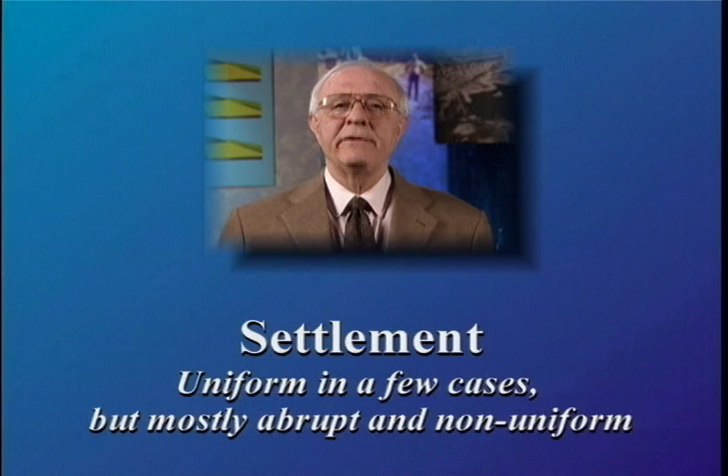In many instances, liquefaction is manifested by the formation of sand boils and mud spouts at the ground surface, as shown in this photograph, taken during an earthquake in northern Japan in 1978. The consequences of liquefaction have been settlement—uniform in a few cases but mostly abrupt and non-uniform—lateral spread, meaning limited lateral movement, for example at the Upper San Fernando Dam, and lateral flow, meaning extensive lateral movement, for example at the Lower San Fernando Dam.

It may be useful to briefly review this phenomenon at this time. When a saturated sand is subjected to ground vibrations, it tends to compact and decrease in volume. If drainage is unable to occur, the tendency to decrease in volume results in an increase in pore water pressure. Thus, the basic cause of liquefaction in saturated cohesionless soils during earthquakes is the buildup of excess pore water pressure due to the application of cyclic shear stresses induced by the ground motions.

As a consequence, the structure of the cohesionless soil tends to become more compact, with a resulting transfer of stress to the pore water and a reduction in the stress on the soil grains. The soil grain structure must rebound to the extent required to keep the volume constant, as illustrated in this figure.

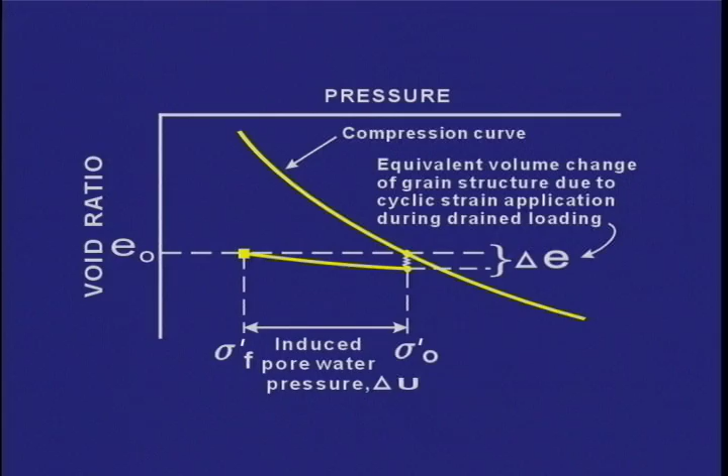As the pore water pressure approaches a value equal to the initial effective confining pressure, the sand begins to undergo deformations. If the sand is loose, the pore pressure will increase suddenly to a value equal to the initial effective confining pressure, and the sand will rapidly begin to undergo large deformations, with shear strains that may exceed 20%. If the sand can undergo virtually unlimited deformations without mobilizing significant resistance to deformation, the sand can be said to have liquefied.

If, on the other hand, the sand is dense, it may develop a residual pore water pressure on completion of a full stress cycle. This pore water pressure would be equal to the initial effective confining pressure. But when the cyclic stress is reapplied on the next stress cycle, or if the sand is subjected to monotonic loading, the soil will tend to dilate, the pore pressure will drop if the sand is undrained, and the soil will ultimately develop enough resistance to withstand the applied stress.

However, the sand will have to undergo some degree of deformation to develop resistance, and as the cyclic loading continues, the amount of deformation required to produce a stable condition may increase.

Liquefaction of sand in this way may develop in any zone of a deposit where the necessary combination of in situ conditions and vibratory deformations may occur. Such a zone may be at the surface or at some depth below the ground surface, depending only on the state of the sand and the induced motions.

Liquefaction of the upper layers of a deposit may also occur not as a direct result of the ground motions to which they are subjected, but because of the development of liquefaction in the underlying zone of the deposit. Once liquefaction develops at some depth in a mass of sand, the excess hydrostatic pressures in the liquefied zone will dissipate by flow of water in an upward direction. If the hydraulic gradient becomes sufficiently large, the upward flow of water will induce a quick or liquefied condition in the surface layers of the deposit.

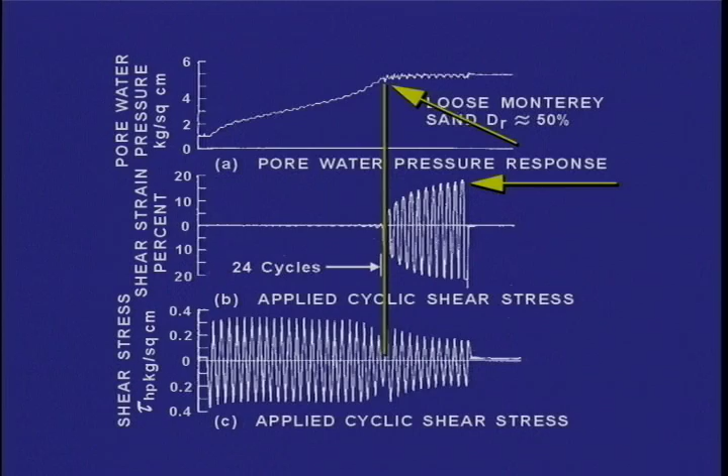When the pore pressure becomes equal to the initial confining pressure, the induced strain in the sample increases very rapidly. For this test, reaching a condition of 100% pore pressure ratio coincides with the onset of inducing very large strains in the sample. This behavior is typical of a sample of loose sands.

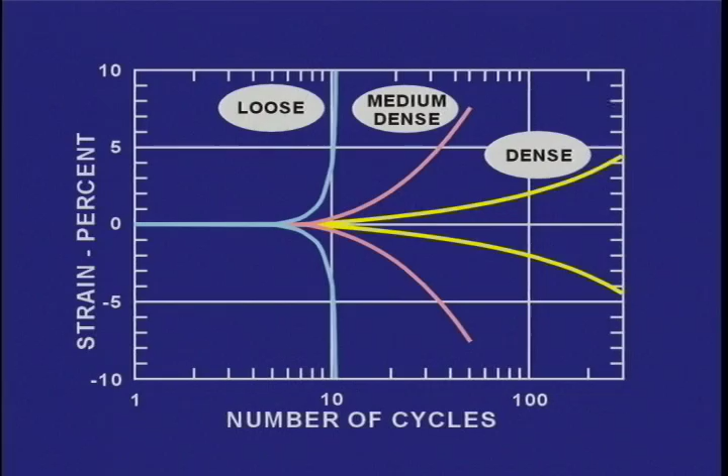Medium dense and dense samples of sand behave significantly differently as shown in this figure. A dense sand can continue to sustain an applied load although a 100% pore pressure ratio had been reached. This ratio typically is reached at about 2 to 3% strain for many cohesionless soils. Reaching 100% pore pressure ratio has been defined as a condition of initial liquefaction.

Tests completed in the past some 35 years indicate that the tendency for a sand to liquefy is affected by: 1. Density, relative density or relative compaction. 2. Effective confining pressure. 3. Level of shaking, applied shear stress, often expressed in terms of the ratio of the cyclic shear stress divided by the initial effective normal stress on the plane of failure.

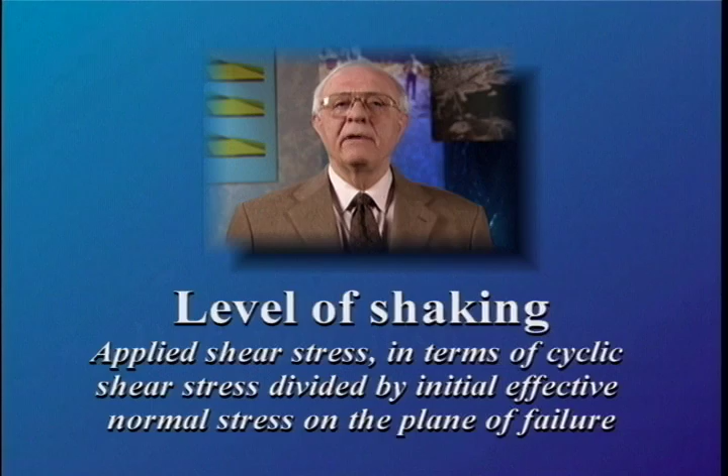4. Duration of shaking, or number of cycles. 5. Soil type and soil structure, or fabric. 6. Stress conditions before onset of shaking. 7. Other factors such as seismic history, geologic history, which may reflect aging, cementation, and other factors.

Field performance data for cases of liquefaction or no liquefaction at sites in Japan, California, and other parts of the world have also been used to establish a relationship between the cyclic stress ratio required to cause liquefaction and some index property that reflects the various parameters we just discussed.

Initially, relative density was used as the index, but was quickly abandoned because it was insufficient to reflect many of the key parameters, such as fabric and aging. SPT blow count and CPT tip resistance can reflect most of the important factors that affect susceptibility to liquefaction.

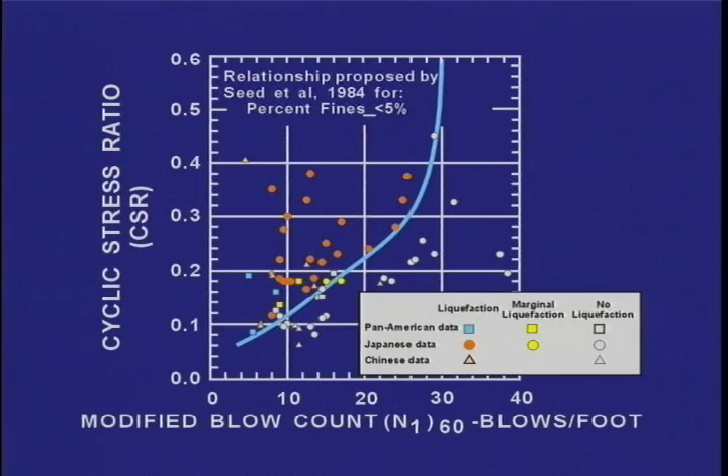This figure summarizes the field cases of liquefaction and no liquefaction for essentially clean sands, that is, fines content less than 5%, in terms of the cyclic stress ratio, CSR, versus modified SPT blow count, N160.

Similar field cases for silty sands with various fines content are also available and were used to develop the relationships shown in this figure. The lower curve in this figure shows the relationship developed for relating the cyclic stress ratio to the corrected SPT blow count, N160, for essentially clean sands. The middle curve is for fines content of 15%, and the upper curve is for cohesionless soils with fines content greater than or equal to 35%.

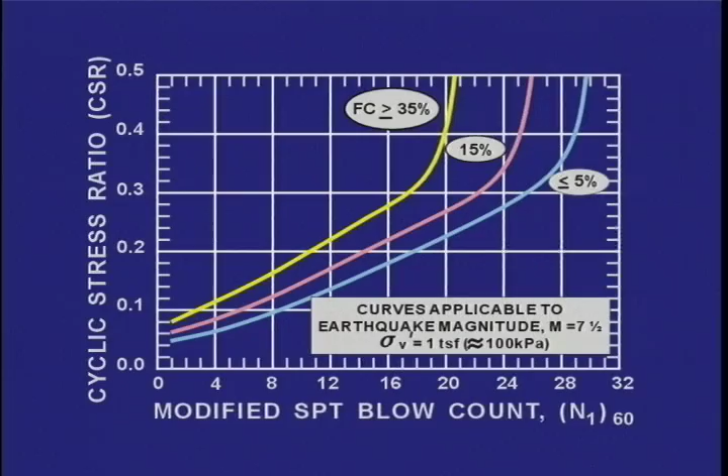Similar curves relating cyclic stress ratio to CPT tip resistance and curves relating cyclic stress ratio to shear wave velocity have also been developed and can be used in many cases.

It has always been my belief that if the cyclic resistance of a soil is to be based on such curves, the use of the SPT-based curves is probably sufficient by itself because the sample is usually obtained when the SPT blow count is collected, and the soil type can then be ascertained and the fines content can be measured if needed.

Such information is not explicitly available for CPT or shear wave velocity measurements. Therefore, I believe it is crucial to augment a CPT-based or a shear wave velocity-based evaluation by sampling.

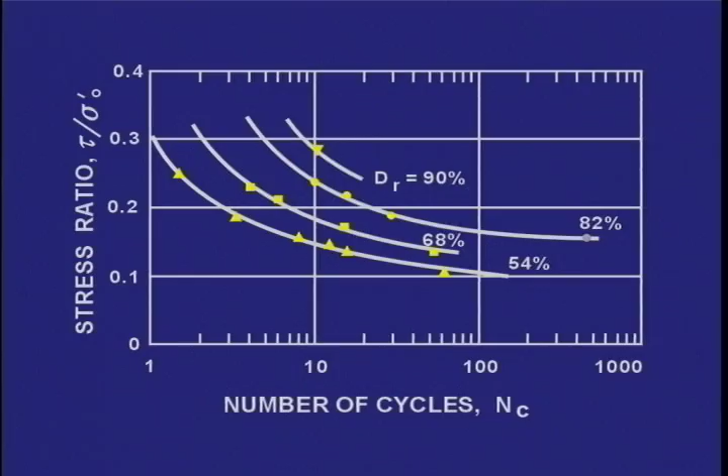When using laboratory test data such as those shown in this figure, it is necessary to select a number of cycles for evaluating the cyclic resistance to liquefaction. The number of cycles has been related to earthquake magnitude as follows.

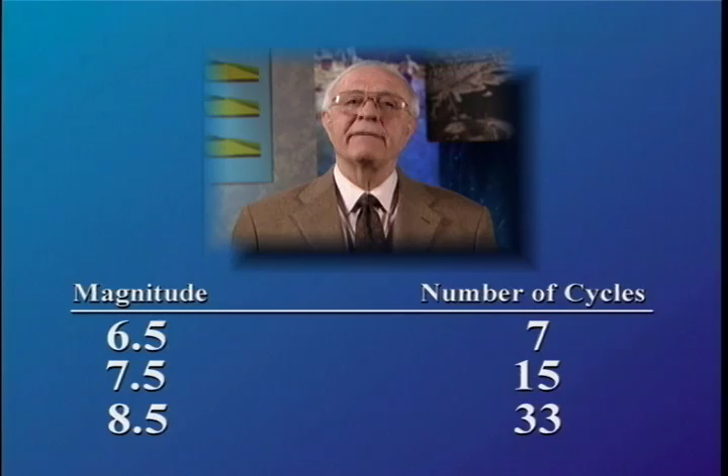Magnitude 6.5, number of cycles equals 7. Magnitude 7.5, number of cycles equals 15. Magnitude 8.5, number of cycles equals 33.

To obtain the cyclic stress ratio for a confining pressure other than 1 ton per square foot, the cyclic stress ratio is multiplied by a factor, K sigma, which depends on the value of the effective confining pressure, as shown in this figure. The symbols in the figure represent the results from a number of cyclic tests. The curves represent values recommended in various studies or projects.

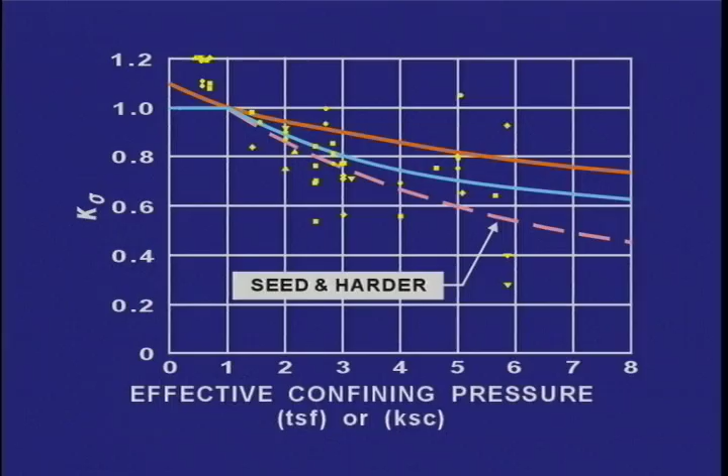The most recent work on this subject, however, suggests that the variation of K sigma with the effective confining pressure also depends on the relative density of the soil, with the effect being least for looser soils. This subject is still under evaluation, and I suggest that the latest work be consulted prior to selecting a K sigma relationship for use in a specific application.

The initial static shear stress on the potential failure plane also influences the resistance to liquefaction. The ratio of this static shear stress divided by initial effective vertical stress on the plane of failure is defined as alpha, as shown in the figure.

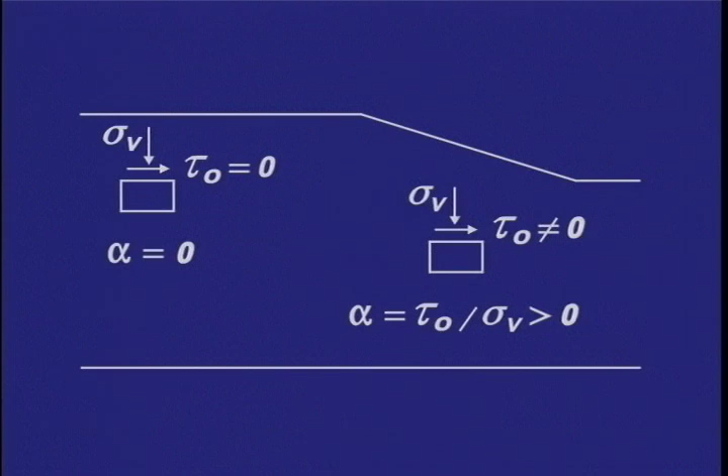Adjustments for the effects of the initial shear stress on the potential failure plane, that is, alpha not equal to 0, are accommodated by multiplying the cyclic stress ratio for alpha equal to 0 by a factor, K alpha, which appears to depend on alpha as well as the denseness of the soil as shown in this figure.

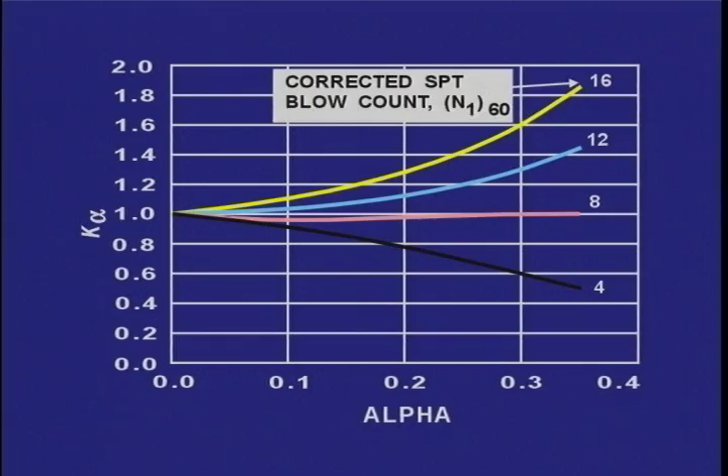It should be noted that the relationships shown in this figure are for an effective confining pressure less than 300 kPa. The values for K alpha shown in this figure will be different for other values of confining pressure. For confining pressure greater than 300 kPa, the curves in the figure would have to be rotated clockwise, that is, giving a lower value of K alpha.

The variation of K alpha with N160 or some other measure of denseness and with confining pressure is also another subject that is being evaluated further. Again, it is recommended that the latest work be consulted prior to selecting a K alpha relationship for use in a specific application.

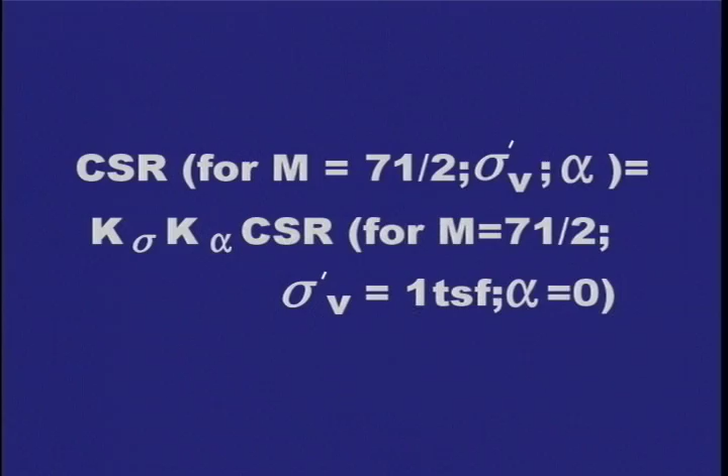Hence, the cyclic stress ratio for a part of the dam or its foundation at a given effective vertical stress and an alpha, and with a corrected SPT blow count N160, is given by this equation. This value of the cyclic stress ratio will then be multiplied by the effective vertical stress to obtain the cyclic resistance at that location, if the duration of shaking were to be representative of a magnitude 7.5 earthquake.

Usually this value of cyclic resistance is to be compared to the stresses induced by the earthquake at that location of the dam or its foundation. The values of stresses induced by the earthquake in the dam or its foundation are usually obtained from a dynamic analysis, which will be discussed later.

In some applications, it may be appropriate to utilize the Seed-Idriss simplified procedure to obtain a first-order approximation of the value of the induced stress at a specific depth. Caution should be exercised when using the latter procedure because it is quite possible to overestimate the inertial force acting at that depth, since the simplified procedure was derived for a level ground.

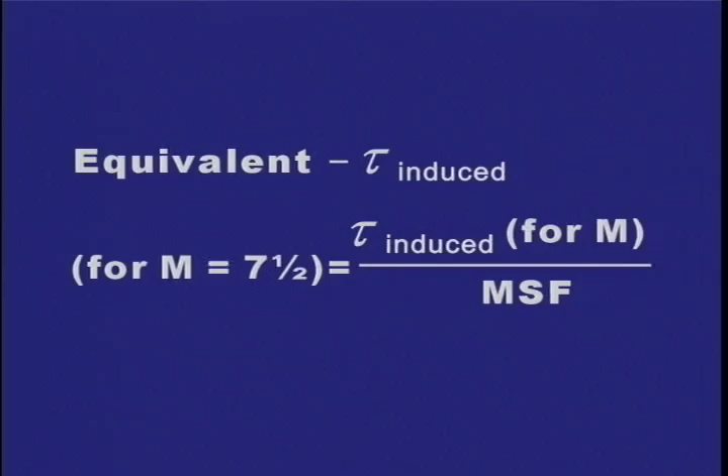If the size of the earthquake being considered is not 7.5, then I prefer to divide the induced stress by the corresponding magnitude scaling factor. This will lead to a value of induced stress equivalent to that induced by an earthquake whose magnitude is 7.5. Thus, the equivalent induced stress is given by this equation.

This equivalent induced stress can then be compared to the cyclic resistance obtained for magnitude 7.5 to assess the potential for liquefaction at that location within the dam or its foundation.

The ratio of the available cyclic resistance divided by the induced stress is typically defined as a factor of safety against liquefaction. When this factor of safety is equal to or less than 1, liquefaction is considered to be triggered within that part of the dam or its foundation.

The actual performance of the dam and its foundation, however, is dependent on the location and extent of the zone where liquefaction is triggered and on the strength of the soil that liquefied. The shear resistance of the liquefied soils has been estimated based on back analysis of available case histories.

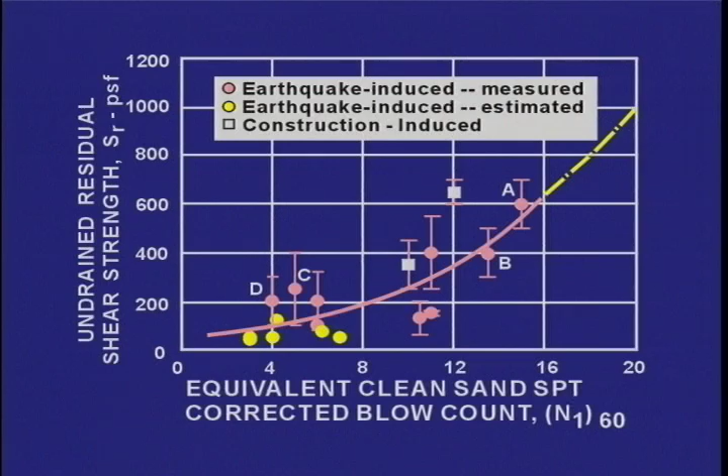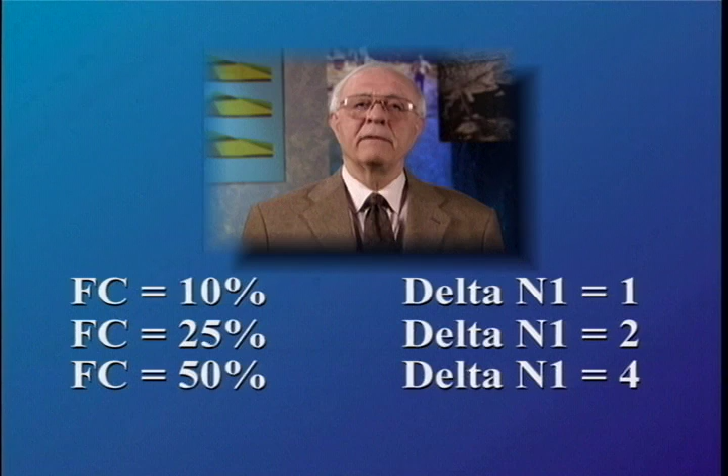The equivalent clean sand N160 is obtained from the measured N160 by adding a delta N1 that depends on the fines content of the soils as follows: for a fines content equal to 10%, delta N1 equals 1; for a fines content equal to 25%, delta N1 equals 2; for a fines content equal to 50%, delta N1 equals 4; and for a fines content equal to 75%, delta N1 equals 5. These values of delta N1 were initially proposed by the late Professor H.

Bolton Seed proposed basing the residual soil strength on evaluation of actual slides. A limit to the residual strength should always be the drained strength of the soil.

For cohesionless soils having fines content greater than or equal to 25%, it is useful to replot the data without including delta N1 and using the resultant relationship for applications involving cohesionless soils with such high fines content. The use of steady state strength has also been proposed to estimate the residual strength of a liquefied soil.

The measurements would be made on very high quality, relatively undisturbed samples of the soils under consideration. The presence of less permeable soil layers overlying the liquefied soils that could impede drainage and result in void ratio redistribution cannot properly be accounted for in a typical steady state test.

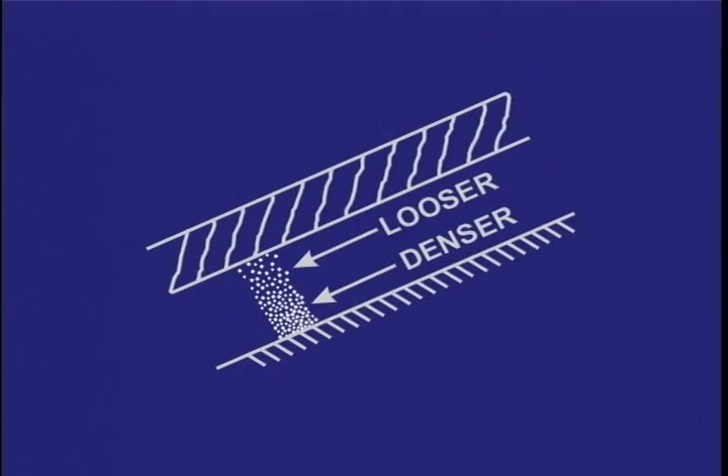This possibility is illustrated in the figure and shows how, due to shaking, the upper portion of the sand layer would tend to become looser while the bottom portion would tend to become denser. The steady state strength of the upper portion is significantly lower than that for a soil having the initial void ratio of the entire cohesionless soil layer.

Accordingly, at this time, it is preferable to use the residual strength based on case histories rather than relying on laboratory test data. This figure illustrates the behavior of a cohesionless soil depending on its denseness.

The bottom curve in this figure is for a specimen of loose sand, which is contractive, and hence it would tend to stabilize at a residual strength far lower than its peak strength. The top curve is for a specimen of very dense sand, which is dilative, and its shear strength would tend to increase as it is sheared further.

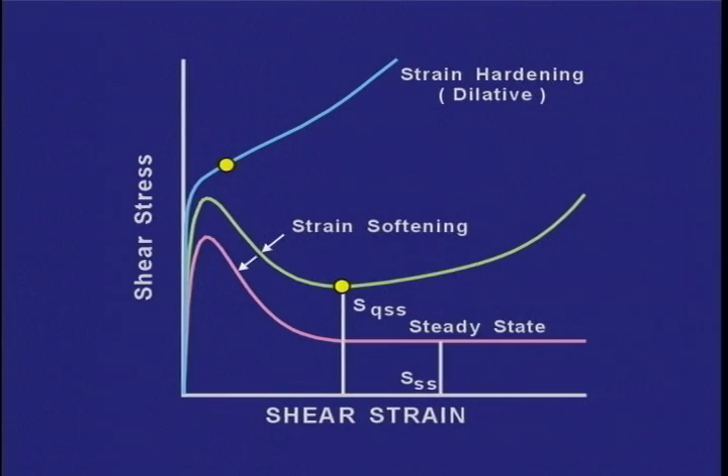The middle curve is for a specimen of sand of intermediate denseness, which could initially reduce in strength to a quasi-steady state, beyond which the soil will dilate, thus increasing its shear strength as shown in the figure.

Therefore, when using residual strength in calculating post-earthquake performance, it is necessary to keep in mind that relatively loose sand must experience large strains to achieve its residual strength. Hence, it is more important to estimate deformation following the occurrence of an earthquake than to just calculate the factor of safety against sliding based on limit equilibrium.

This aspect will be discussed later when we turn our attention to analysis and evaluation procedures. The above discussion pertains to cohesionless soils. Occasionally, we are concerned also with the behavior of cohesive soils. Most cohesive soils do not suffer appreciable reduction in strength due to cyclic loading.

Typically, a reduction in strength of the order of 10 to 20% may be reasonable to assume, depending on the intensity of shaking. We must keep in mind, however, that some cohesive soils with very high water content have exhibited significant loss of strength due to shaking.

These soils are usually evaluated using the so-called Chinese criteria. In most cases, however, results of cyclic tests on properly prepared samples of such soils may prove to be more appropriate to use than applying the Chinese criteria.

The Chinese criteria are most useful for screening purposes, and I strongly suggest that the criteria be applied with a great deal of caution. Since the Chinese criteria utilize water content, liquid limit, and clay fraction, some uncertainty should be applied to each of these parameters when applying these criteria.

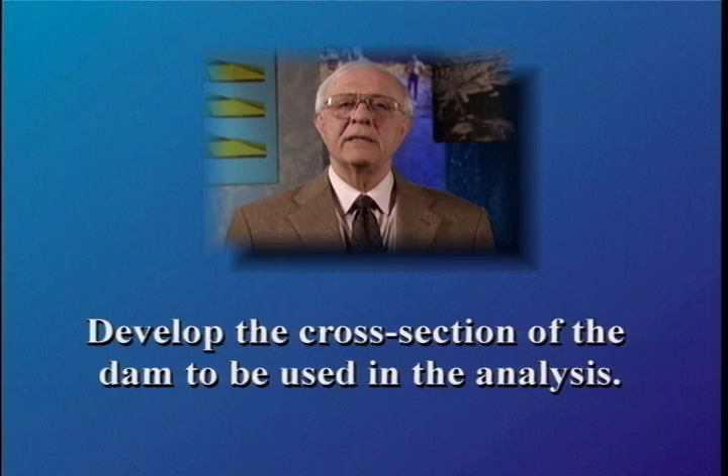The steps involved in this analysis procedure are the following. One, develop the cross-section of the dam to be used in the analysis. Two, select an accelerogram for use as input at the base of the dam foundation system. This selection is to be completed in cooperation with geologists and seismologists. Three, determine as accurately as possible the stresses existing in the embankment before the earthquake.

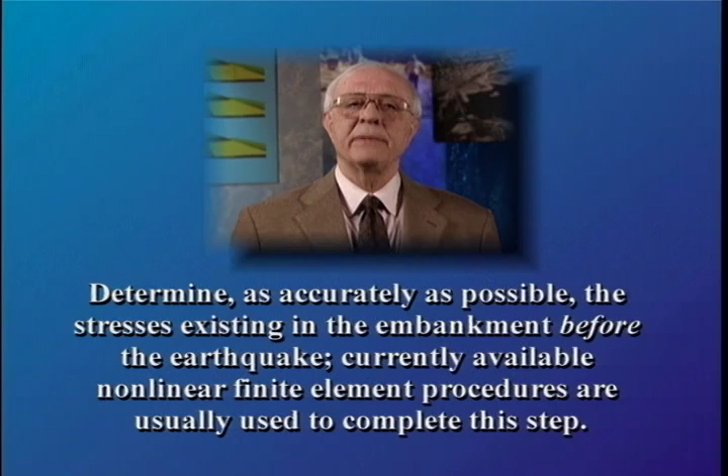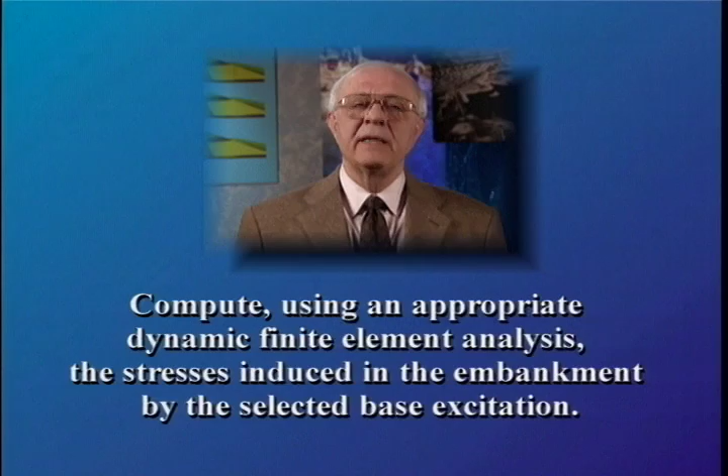Currently available nonlinear finite element procedures are usually used to complete this step. Four, determine the strain-compatible dynamic properties of the soils comprising the dam. Five, compute, using an appropriate dynamic finite element analysis, the stresses induced in the embankment by the selected base excitation. Six, ascertain the cyclic resistance of the soils comprising the embankment. This may be done by testing appropriate samples of the soils or by relying on correlations with in situ properties such as SPT or CPT.

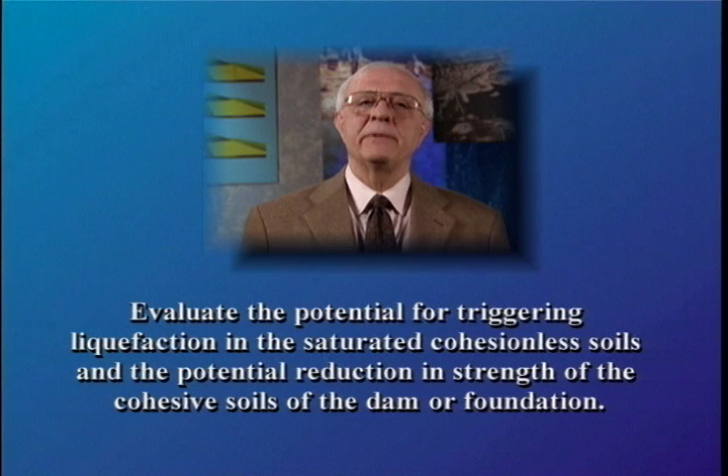Seven, evaluate the potential for triggering liquefaction in the saturated cohesionless soils and the potential reduction in strength of the cohesive soils of the dam or foundation. Eight, check the stability of the cross-section after the shaking has stopped, incorporating the results of step seven.

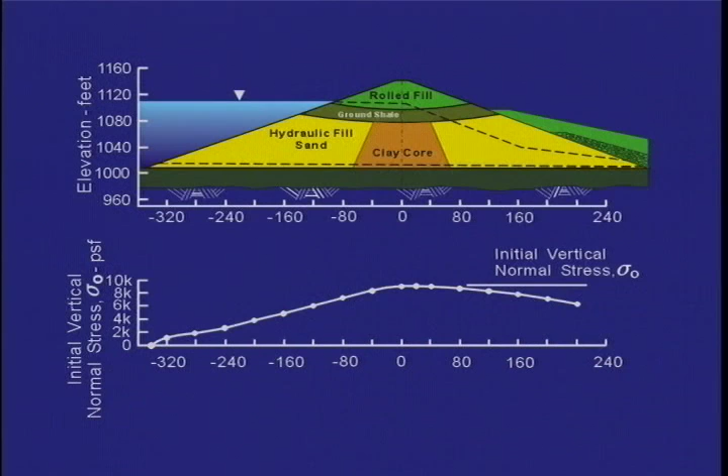The application of the Seed-Lee-Idriss analysis procedure is illustrated in the next few figures, as it was applied to the lower San Fernando Dam, which suffered a massive upstream slide as a result of the shaking it received during the 1971 San Fernando earthquake. The upper part of the first figure shows the maximum cross-section of the dam and its foundation. The lower part of the figure shows the calculated initial, that is prior to the earthquake, vertical normal stresses, sigma o, along the horizontal profile depicted in the upper part of the figure.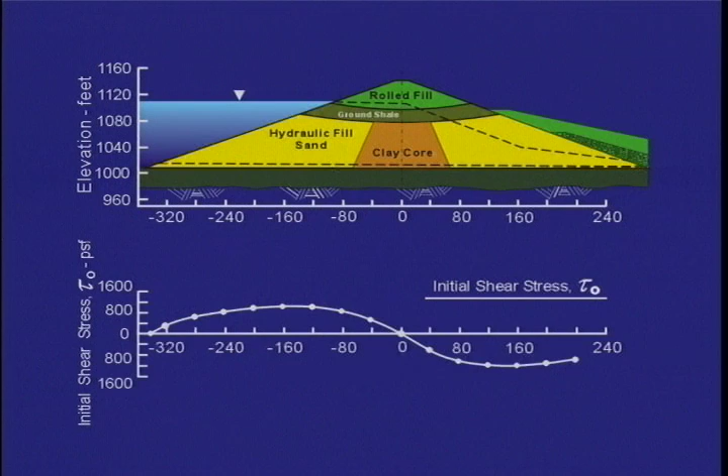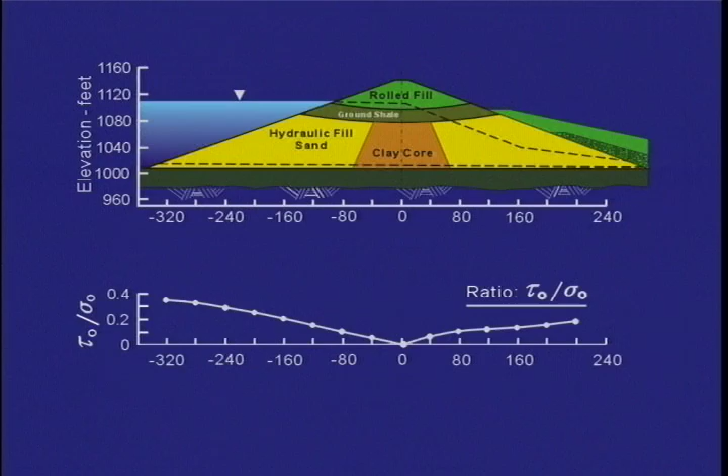The next figure shows the calculated initial shear stresses, tau, along the same profile. The ratio of tau over sigma v prime, that is alpha, is depicted in the lower part of this figure. The static stresses shown in these figures were calculated using a nonlinear finite element program developed by Professor Duncan and his colleagues. The accelerogram used as input to the base of the dam foundation is shown in this figure.

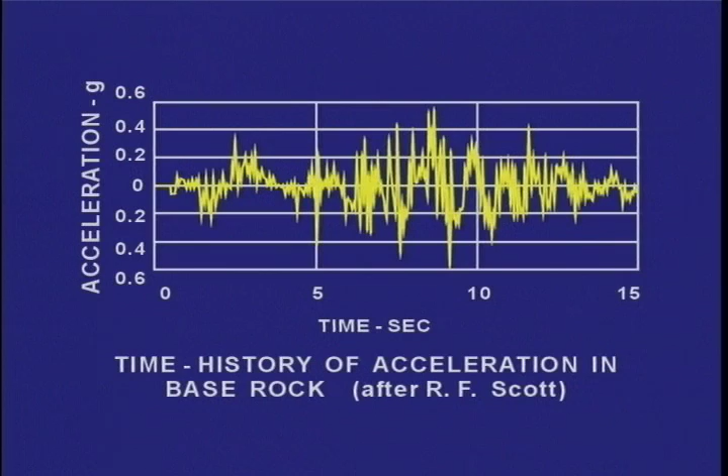This accelerogram was constructed by Professor R.F. Scott using the seismoscope record obtained at the abutment of the dam. The program Quad4 was used to calculate the shear stresses induced by the shaking.

The equivalent uniform shear stresses induced along the same horizontal profiles shown previously, after the first 10.5 seconds of shaking, are presented in the lower part of this figure. The number of equivalent uniform cycles estimated for this duration, using 65% of the maximum induced shear stress, is 2 cycles. Also shown in the lower part of the figure are the values of the cyclic stress required to cause liquefaction in 2 cycles. The latter values had been determined from the results of cyclic triaxial tests conducted on samples of the shell material.

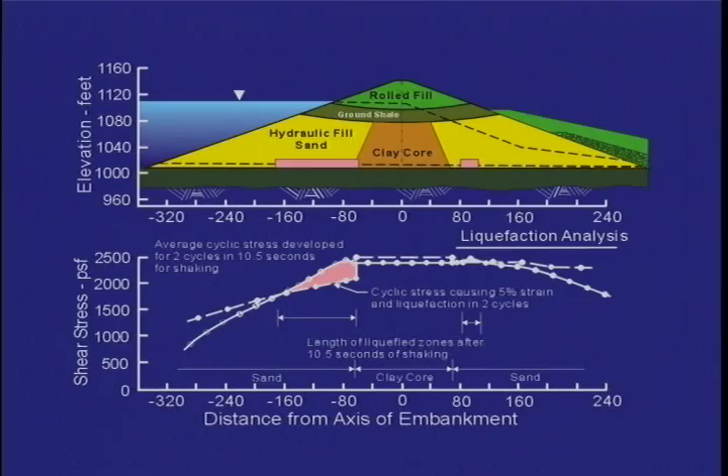The portions along the horizontal profile where the induced stresses exceed the stresses required to cause liquefaction are identified as having liquefied, and are depicted in red in the upper part of the figure. Similar evaluations were made along additional horizontal profiles within this section of the dam to identify the portion of the shells that would liquefy during this earthquake. These are shown in red in this figure.

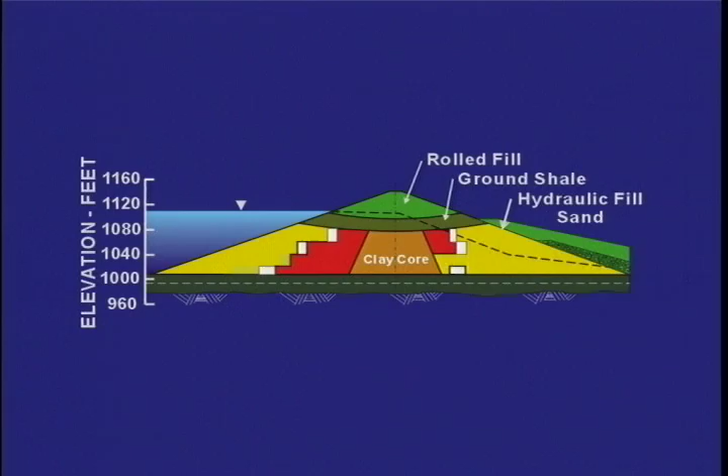As the shaking continues, the extent of liquefaction increases within the shell, as shown in this figure. The full extent of liquefaction within the shells is depicted for the entire duration of shaking. The results of the dynamic analyses, coupled with laboratory cyclic test results, provided the means to estimate the extent of liquefaction in the shells of the Lower San Fernando Dam.

The shear strength within the liquefied portion is reduced, and the possibility of a slide is checked by conducting a limit equilibrium static slope stability analysis, as shown in this figure. This analysis indicates that the slope is, at best, on the verge of slipping.

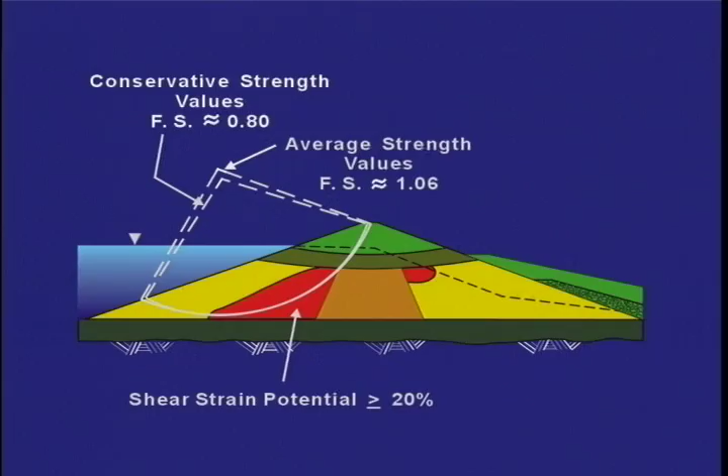More recent work on the post-earthquake stability of this cross-section provided an estimate of the residual strength of the liquefied soils within the upstream shell of this dam. As I noted earlier, equivalent linear procedures are adequate for calculating shear stresses induced by earthquake ground motions.

The equivalent linear procedure is useful in assessing the extent of concern with an existing embankment dam. If results indicate that no significant portions of the dam are likely to have significant reduction in strength due to shaking, then the dam will most likely perform quite well during future earthquakes.

If, on the other hand, this type of analysis indicates that large portions of the dam can have major reduction in strength due to liquefaction being triggered, then further evaluations are needed to judge how poorly the dam would perform if no remediations are implemented.

Limit equilibrium slope stability analyses would be useful to conduct in the following sequence. Step 1: Assign the appropriate residual strength to the soils in the liquefied zones. If the calculated factor of safety is less than or slightly above unity, then this dam is likely to have a flow slide and remediation is necessary. If, on the other hand, the factor of safety is well above unity, conduct the analysis suggested in Step 2.

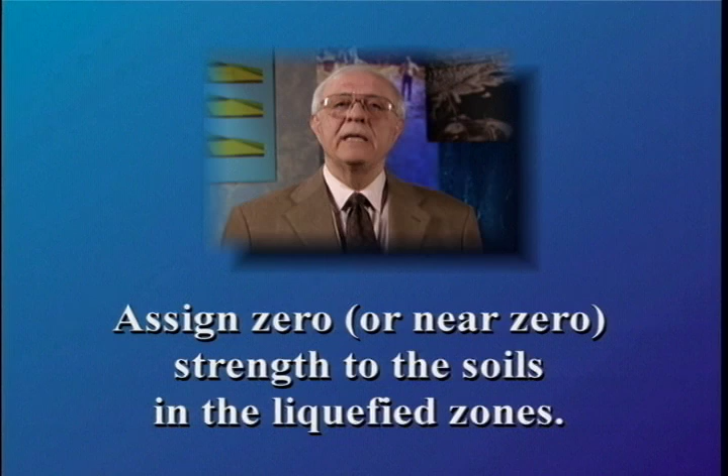Step 2: Assign zero or near-zero strength to the soils in the liquefied zones. If the calculated factor of safety is still well above unity, then the dam is likely to experience only minor movements and no extensive remediation is needed. If, on the other hand, the calculated factor of safety is now less than or slightly above unity, then this dam is likely to have major movement and remediation may be necessary.

To judge the need and extent of remediation, deformation analyses are required. To evaluate deformations of a dam, it is necessary to utilize a fully nonlinear procedure to estimate movements or deformations. In many cases, it is sufficient to compute these deformations for the post-earthquake conditions. Static nonlinear analyses can be used for this purpose.

This would be the case if the duration of shaking is relatively short, so that liquefaction is most likely to occur near the end of shaking. In some instances, it is necessary to estimate the deformed shape of the embankment during shaking and after shaking stops. Dynamic nonlinear analyses are needed for such calculations.

These analyses are usually needed when the duration of shaking is relatively long and liquefaction is likely to occur well before shaking stops. At this time, there are several procedures that have been used for calculating the deformed shape of an earth dam due to an earthquake.

When using nonlinear procedures, it is important that appropriate calibration of the procedure and the associated computer program have been done and verified. The end of this video includes references to nonlinear procedures that have been used most widely in the past few years. To examine the usefulness of using nonlinear procedures, I will summarize two cases.

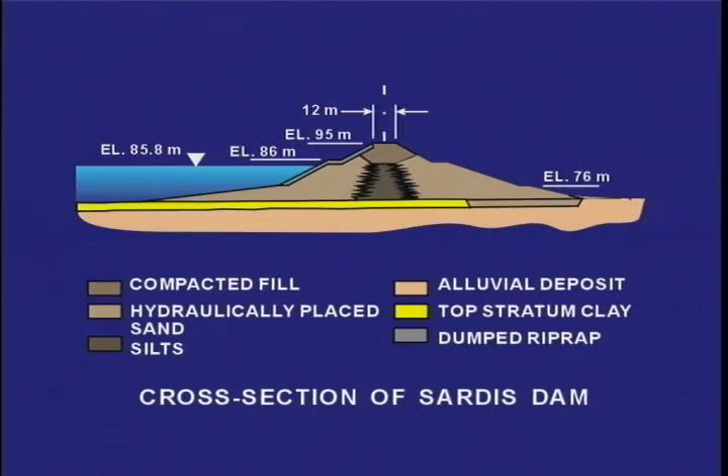The upper part of the foundation consists of what is known as the top stratum clay, which is underlain by a relatively competent alluvial deposit consisting of sands, underlain by tertiary silts and clays. Sardis Dam is a U.S. Army Corps of Engineers dam.

It was evaluated by the Vicksburg District for a magnitude 8 earthquake occurring in the New Madrid seismic zone, resulting in a peak acceleration of 0.2 G in the free field of the dam site. The Corps of Engineers was assisted in this evaluation by Woodward Clyde Consultants, the Waterways Experiment Station, Professor James K. Mitchell, and Professor Liam Finn.

An equivalent linear analysis indicated that liquefaction is likely to occur in the hydraulically placed silt core and in the lower portions of the hydraulically placed upstream shell.

The upper part of the top stratum clay was judged to have the potential to suffer major loss of strength and was assigned a residual strength corresponding to an effective angle of friction of about 4.5 degrees. The post-earthquake factor of safety of the weakened cross-section was well below 1, indicating that the dam is likely to deform significantly due to the earthquake ground motions under consideration.

which could impair the stability of the dam. Accordingly, the Corps of Engineers decided to remediate the dam. After evaluating many of the potential remediation options, concrete piles were selected to be driven through the lower part of the upstream shell and well below the top stratum clay, as shown in the figure, thus providing the additional resistance to constrain movement of the upstream shell.

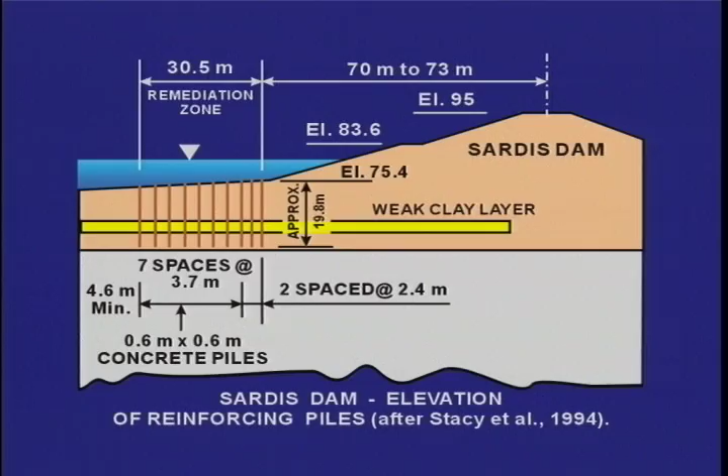The layout of the piles is shown in this figure. The dam is approximately 4,600 meters long, but only two segments of the dam required remediation. One segment is about 213 meters long, where 676 piles were driven. The other segment is 610 meters long, where 1,918 piles were driven, for a total of 2,594 piles.

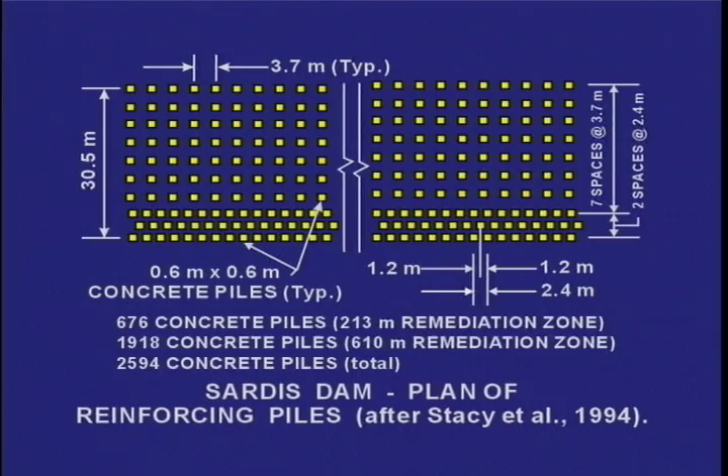It is noteworthy that the nonlinear deformation analyses were extremely helpful in optimizing the location and the spacing of the piles. The second example is the Wickiup Dam in central Oregon. A cross-section of the dam is shown in the figure.

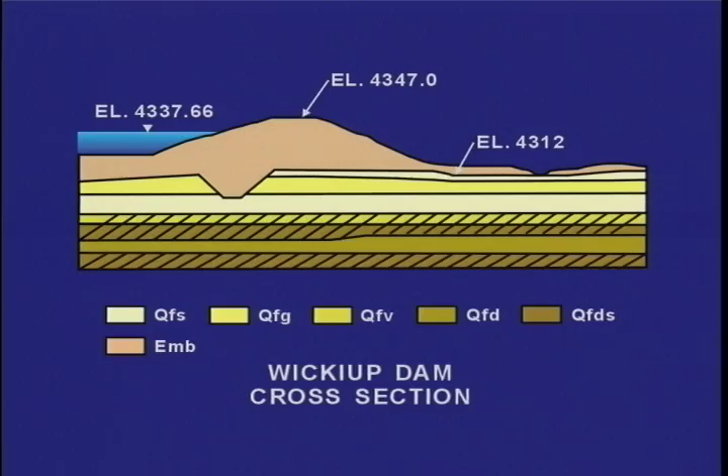The performance of the dam during a great earthquake occurring on the Cascadia subduction zone and producing a peak acceleration of only 0.1 g, but with a duration of over 2 minutes, was evaluated by the Bureau of Reclamation. The Bureau was assisted in this evaluation by URS Woodward-Clyde.

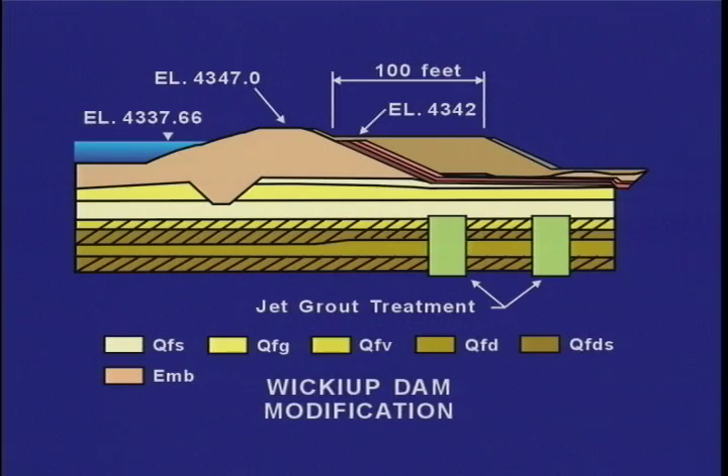The computer program FLAC, incorporating a nonlinear soil model, was used to assess the deformation pattern of the dam in its existing condition and as remediated. Again, the nonlinear analyses were very helpful in optimizing the solution, which consists of using jet grout to create 2 blocks within the foundation and the placement of a downstream buttress as shown in the figure.

Let me now take a few minutes to talk about the Newmark analysis. Professor Newmark proposed a simple method for computing the displacement of an embankment. This method is based on the concept that movement would be initiated when the inertial force acting on the potential sliding mass exceeds the yield resistance of that mass.

This movement would persist so long as the inertial force is larger than the yield resistance. The movement would stop when the inertial force becomes less than the yield resistance. This approach is illustrated schematically in the figure.

The weight of the block is W, and the inertial force is given by the weight multiplied by a seismic coefficient K, which represents the acceleration of the block. The seismic coefficient is expressed as a function of time, k(t), as shown in the figure. The block would move down the slope when the inertial force exceeds the yield resistance, shown as the weight of the block times a yield coefficient ky.

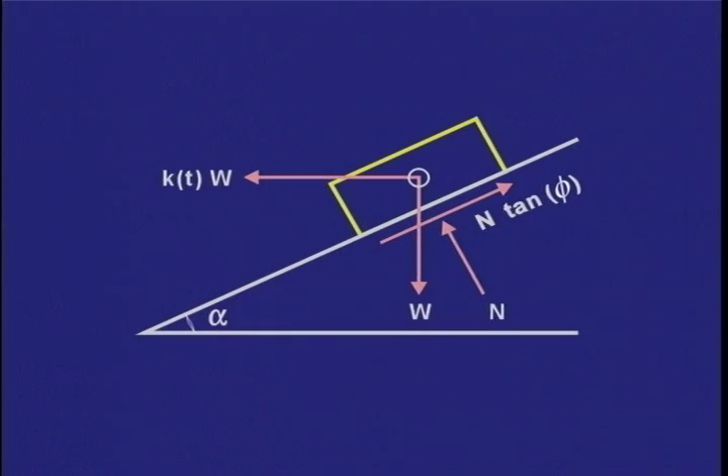The yield resistance for the schematic shown is dependent on the inclination of the slope and on the frictional resistance between the mass and the slope. For an actual slope, the value of ky is obtained by conducting a series of pseudostatic analyses, each with an increasing value of the applied seismic coefficient k.

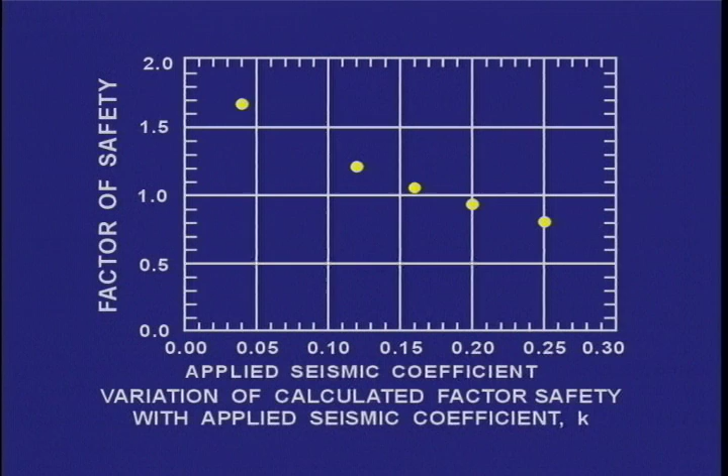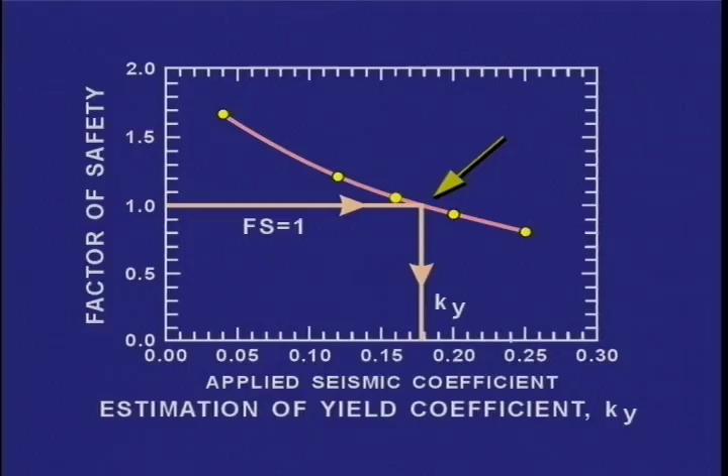Newmark considered the sliding mass to be rigid and hence assumed that the inertial force is caused by the acceleration applied at the base of the block. That is, k as a function of time is equal to the acceleration at the base as a function of time. Many analyses have been conducted using this assumption.

The modeling work by Goodman and Seed in 1966, and later refinements by Seed and his colleagues, and by Ambraseys and Sarma, suggested that the inertial forces need to incorporate the dynamic response characteristics of the potential sliding mass. Therefore, they suggested using essentially the average acceleration within this mass to represent the seismic coefficient k as a function of time. Many of the analyses using the Newmark method have incorporated this modification over the past 30+ years.

The values of k as a function of time for a potential sliding mass in an embankment can be obtained using one of the dynamic analysis programs discussed earlier. One-dimensional programs, such as Shake, have been used for this purpose. My personal preference is for the use of a two-dimensional program to account for the correct geometry of the potential sliding mass.

Once k as a function of time is obtained for a potential sliding mass, the Newmark analysis is carried out by integrating the portions of k from t1 to t2 that exceed ky, as shown in the figure. This integration provides values of velocity over the time increment t1 to t3, and integration of the velocity trace provides the value of permanent displacement the potential sliding mass would experience up to time t3.

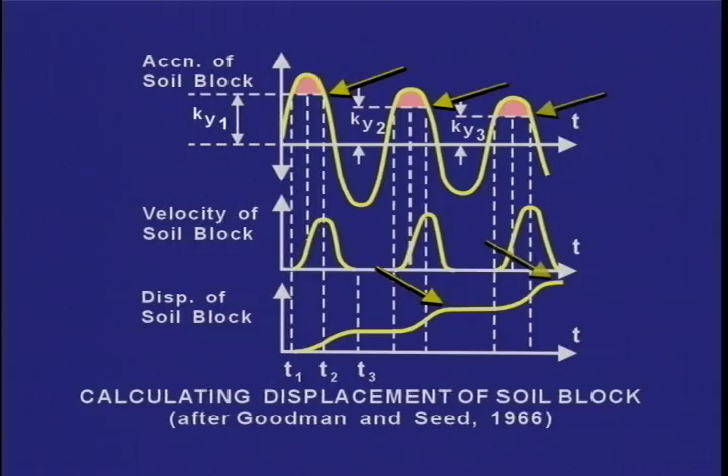As noted in the figure, the value ky need not be kept constant for the entire duration of shaking. Reduction in ky to account for possible loss of strength can be incorporated in such an analysis. However, care should be exercised if this approach is attempted, because not only will ky decrease if the strength is reduced, but there would also be changes in the value of the seismic coefficient.

Approximate values of potential movements can be obtained this way, but to obtain a more accurate estimate and to examine the sense of potential movements, a nonlinear dynamic analysis is required.

The Newmark analysis has been simplified by Makdisi and Seed and by Franklin and Chang, who produced charts such as that shown in this figure. This chart provides estimates of displacement of a potential sliding mass if the value of ky is known for this mass, and if the maximum value of the seismic coefficient Kmax is also known.

Kmax can be obtained directly from the time history of k as a function of time, or using approximate procedures such as that suggested by Makdisi and Seed. Note that the value of Kmax to be used with such charts is the peak and not an equivalent uniform value.

Charts such as that shown in this figure have proven to be useful for screening purposes and for initial estimates of potential deformations of an embankment dam. They are also useful for making a quick check of whether the potential movements would be shallow or deep-seated by examining various potential sliding masses.

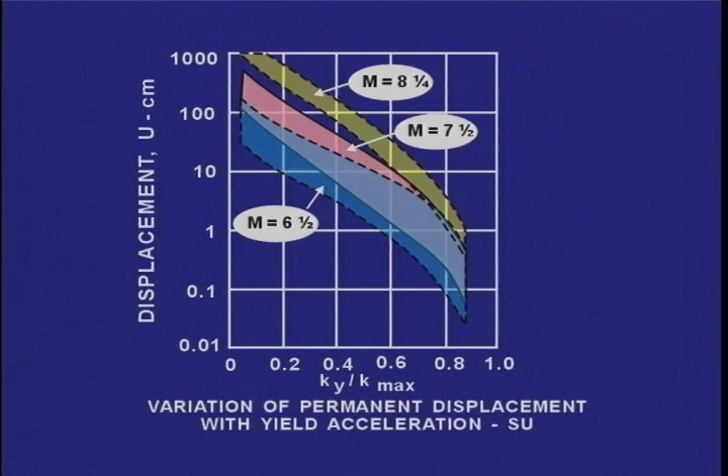Note that reduction in ky due to loss of strength caused by shaking can also be accommodated using this chart, by carrying out the analysis per cycle instead of for the full duration of shaking. For example, the range of displacement for a magnitude 7.5 earthquake can be divided by the number of cycles for this magnitude, which is estimated to be 15 cycles, as we discussed earlier in this video.

A new plot can then be created to exhibit the displacement per cycle for magnitude 7.5 as a function of the ratio ky divided by Kmax. The engineer can then estimate the value of ky and Kmax for each cycle, starting with cycle number 1, which would have the largest value of ky, that is, no strength reduction as yet.

The value of ky can be adjusted for subsequent cycles depending on the extent of the strength reduction estimated up to that cycle. Adjustment to Kmax can also be incorporated. Displacement of the potential sliding mass can then be calculated for each cycle, and the total displacement would be the sum for all cycles.

This approach was used to back-calculate the displacement in the 4th Avenue slide in Anchorage during the 1964 earthquake, where a strength loss of two-thirds was applied when a movement of the slope exceeded half a foot. Further details about this analysis are given in the reference listed at the end of this video.

This approach is not recommended for cases where the strength loss in a potential sliding mass is extensive and can occur early in the shaking, for example, when the soil has very low penetration resistance.

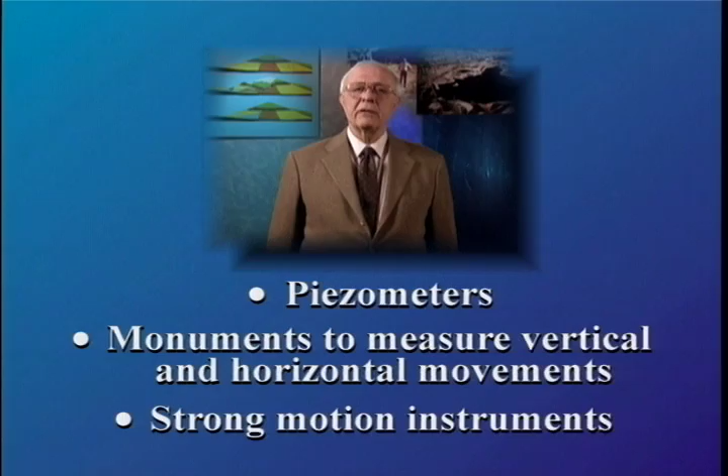These instruments provide extremely valuable data when an earthquake occurs within a certain distance of the dam. Downhole arrays through the crest of the dam and at other locations in the dam or downstream of the dam are also very valuable to have. At this time, 2002, only a few dams have such downhole arrays installed.

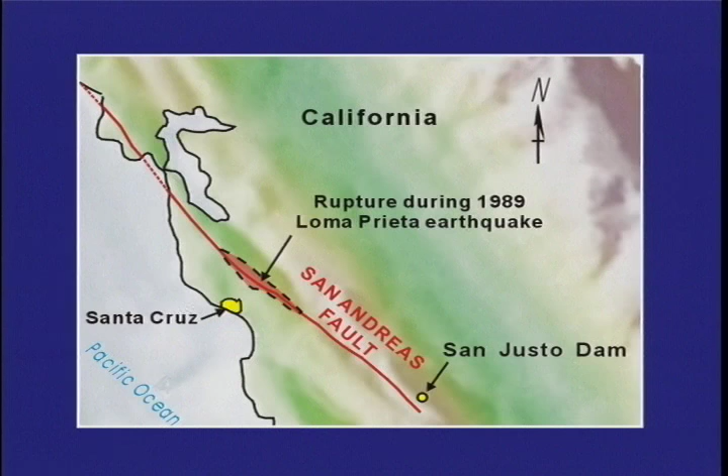The San Justo Dam in California was equipped with such an array prior to the 1989 Loma Prieta earthquake. The location of this dam with respect to the rupture zone in the Loma Prieta earthquake is shown in this figure.

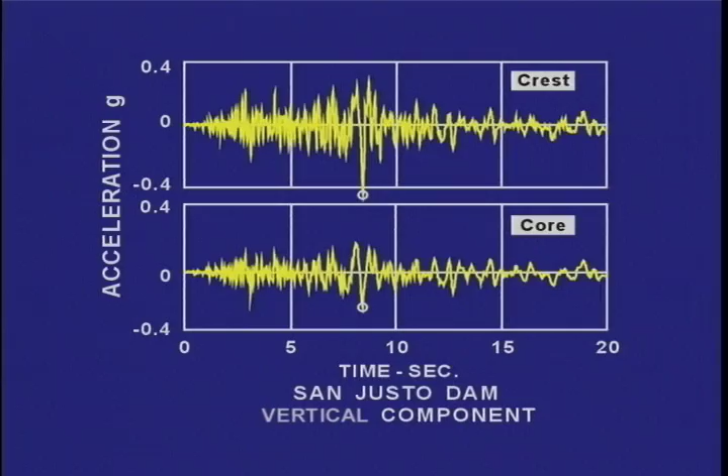The recordings obtained from these instruments during the Loma Prieta earthquake have been very valuable in understanding the variations in motions at various locations in the dam and for calibrating available analytical procedures.

A useful application of the strong motion data obtained at several dams in California is illustrated in this figure. Values of the recorded peak transverse acceleration at the crest of the dam are plotted versus the corresponding values at the toe, or some distance away from the toe of the dam. The data were obtained at dams ranging in height from a little less than 100 feet to several hundred feet, and during earthquakes ranging in magnitude from a little less than 6 to magnitude 7. This figure shows the nonlinear trend of the data and the possible variations in peak crest acceleration as a function of the acceleration at or near the toe of the dam.

The information in this figure provides an excellent means for checking the reasonableness of any analysis completed for a dam, if the toe acceleration is used as an approximate proxy for the input acceleration to the dam under consideration. For example, if the peak input acceleration is 0.2g, the crest acceleration may vary from about 0.25 to 0.45g, depending on the height of the dam and the frequency content of the input motion.

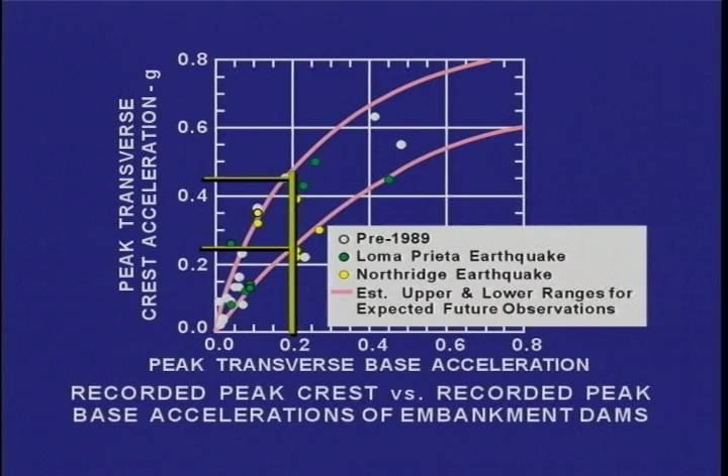If the input motion is rich in high frequencies, which would be expected from a small magnitude earthquake occurring close to the dam, then a low dam would experience a peak crest acceleration of about 0.45g, while a high dam would experience a peak crest acceleration closer to 0.25g. If, on the other hand, the input motion is richer in the intermediate and low frequencies, which would be expected from a high magnitude earthquake, the opposite trend in peak crest acceleration would be the case.

At this time, I would like to offer the following concluding remarks. The case histories reviewed earlier and the lessons learned from these case histories emphasize the need for our concern with the effects of earthquakes on embankment dams.

The work that has been going on over the past 35 or so years in terms of testing, analytical studies, and physical modeling have provided us with the insight and the means to make reasonable assessments of the performance of such dams during and following the occurrence of an earthquake. When the performance has been judged inadequate and the consequences unacceptable, the following options are available.

Remediation of existing dams are designed and constructed. Examples of such remediation solutions at 2 existing dams were presented earlier, and Professor Mitchell in his video presentation covered available remediation techniques and several examples.

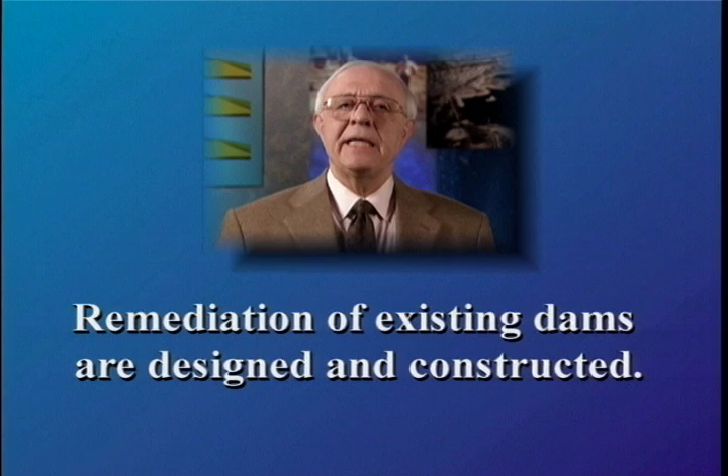For a new dam, modifications to the design and construction are made. Such modifications could be in terms of changing compaction requirements, changing material types, placing the least vulnerable material where it does the most good, or other defensive measures. For a new dam, the technology available today, including testing, analyses, and construction equipment, makes it possible to design and construct an embankment dam that will perform very well in the event of an earthquake.

2 excellent examples of such new designs are the recently completed Seven Oaks Dam and the East Side Reservoir in Southern California. The Seven Oaks Dam was designed and constructed by the Corps of Engineers, is almost 600 feet high, and is about 3 kilometers from the San Andreas Fault.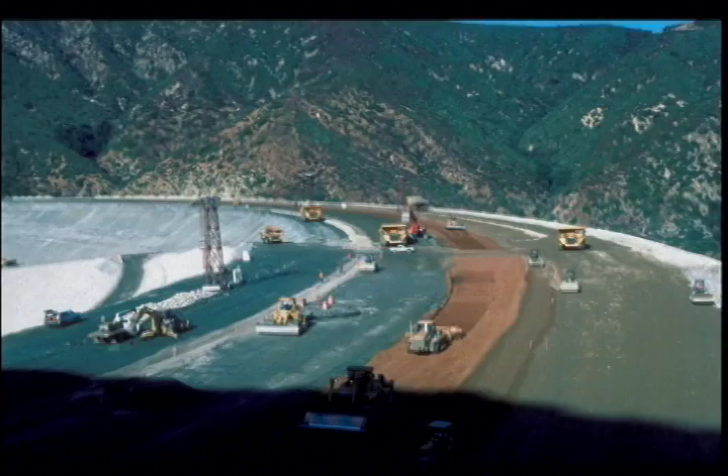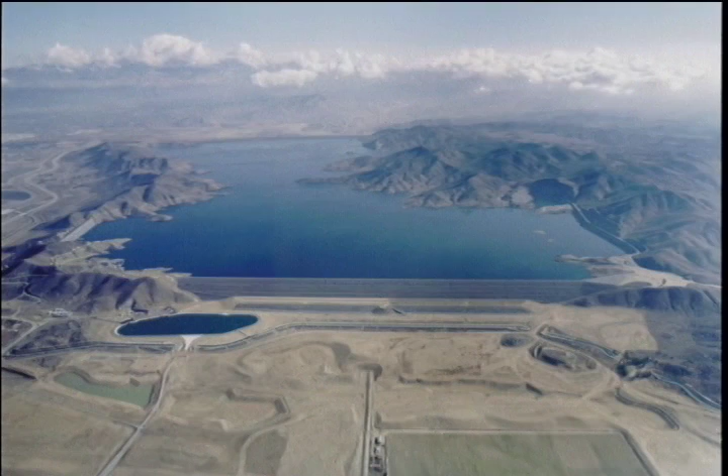The East Side Reservoir, which is owned by the Metropolitan Water District, includes 3 dams with heights up to about 300 feet and is 5 to 8 kilometers from the San Jacinto Fault and only a little more distant from the San Andreas Fault. It is important to emphasize that in no case should any changes made to accommodate seismic performance be allowed to impair the behavior of the dam under normal operating or other conditions.

Above all, a great deal of judgment is required in every step when we are evaluating a dam under static or earthquake loading conditions. Professor Peck concluded his video presentation by reminding us that, and I'm quoting him, "The risk of failure of any dam cannot be reduced to zero."

He also indicated that, quote, "Fortunately, the likelihood of a failure can be minimized by intelligent and conscientious surveillance and timely maintenance, rehabilitation, or repair of the structure," end of quote. These are timeless statements and apply for all loading conditions. They should be heeded by all persons involved in dams.